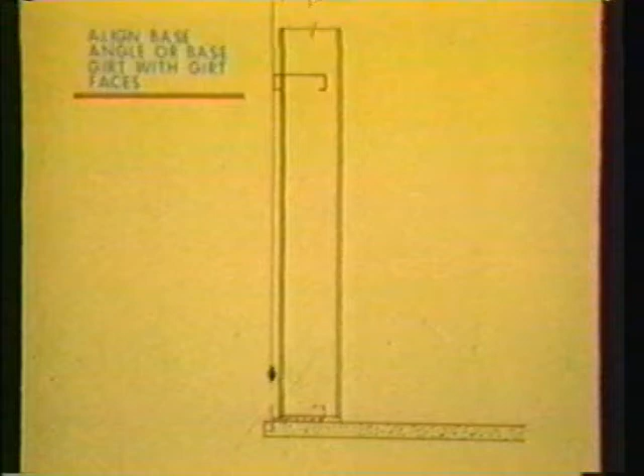...of the base for the wall sheets. This can be easily accomplished with a plumb line. Avoid setting base angle inside concrete edge. Otherwise, panel dimples can occur when fasteners are driven.

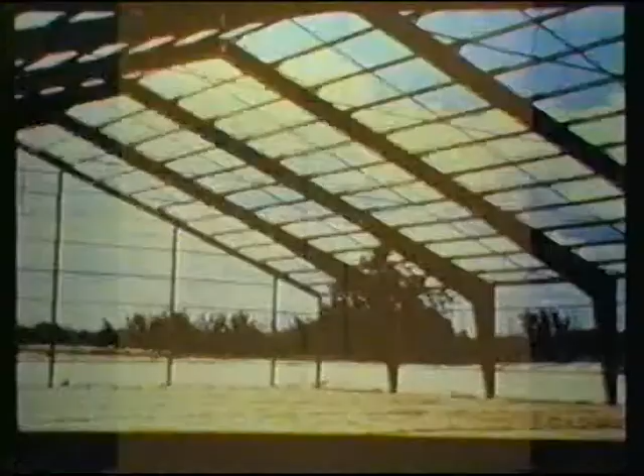Upon completion, the skeletal structural steel should include all primary and secondary framing with all flange braces, rod bracing, girts, purlins, support angles, sag rods, and other miscellaneous structural components in place.

A final alignment check should be made before sheeting begins to see that all member structures are plumb and aligned properly. Once the panels are installed, it is difficult to correct any structural steel alignment problems without removing or damaging the sheeting. Give the structural steel a final connection inspection to ensure all bolts are in place and properly tightened.

Bolt grades and tightening procedures vary from connection types. The primary high-strength A325 or A490 bolts must be tightened according to specific procedures, while secondary bolts are not. The builder must be thoroughly familiar with each. He must also be aware of the connection inspection procedures stated in the specifications and the material and procedural requirements called for on the erection drawings.

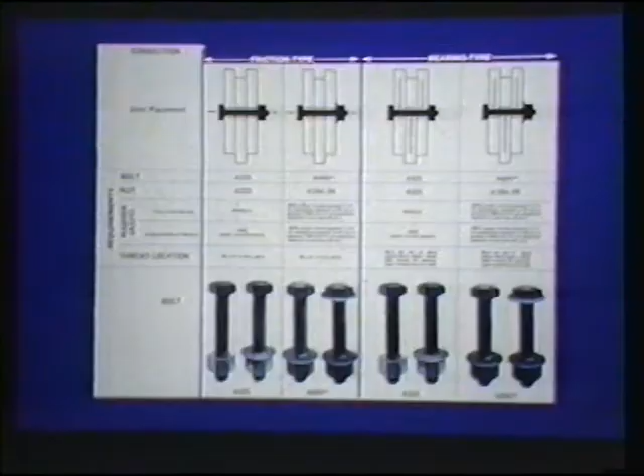It's a good practice to initial all completed connections. This way, a temporarily incomplete connection will not go unnoticed. A check should also be made to ensure that there are no damaged members which could require removal of the sheeting to repair. Some damage may be considered superficial without effect to structural integrity.

When in doubt, consult with the manufacturer. Modifications should not be made to any structural members that are damaged or do not fit without approval from the proper authorities.

Sheeting and trim, Section 6. The owner's acceptance of any building depends on its finished appearance. Sheeting, trim, and accessories are the most conspicuous elements of construction. They must be installed with the greatest of care.

Just as with structural steel erection, the crew should go over the manufacturer's detailed installation prints before sheeting begins. This will ensure proper and efficient installation of panels and trim and minimize the probability of most common errors. The tools, materials, and techniques of proper sheeting and trim installation are simple. By meticulously following manufacturer installation instructions, the builder can avoid unnecessary and expensive callbacks.

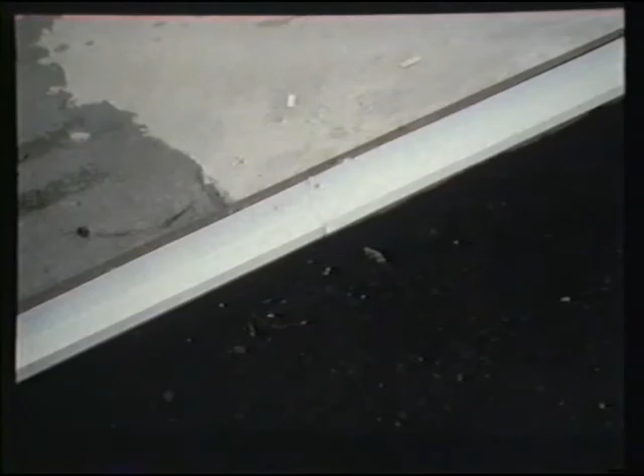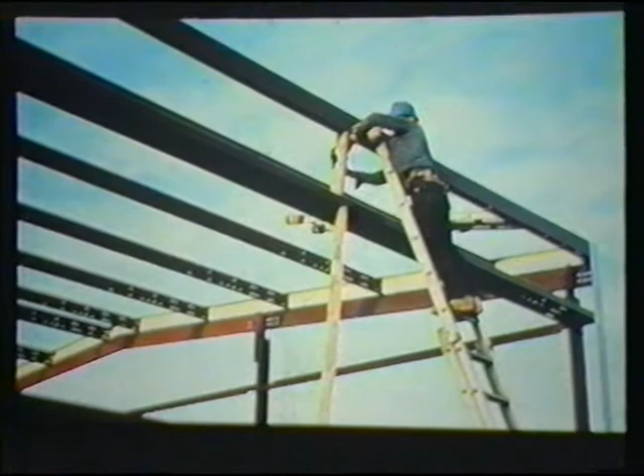It is strongly recommended that the wall sheeting be installed first. Wall panels lend a high degree of rigidity to an incomplete structure. Before the first wall panel can be installed, the base condition must be in place. Purlins can be aligned with a sag angle or blocked. Girts, especially those spanning wide bays and wings, have a tendency to sag. To align, it is recommended that the erector shore them up with wood struts.

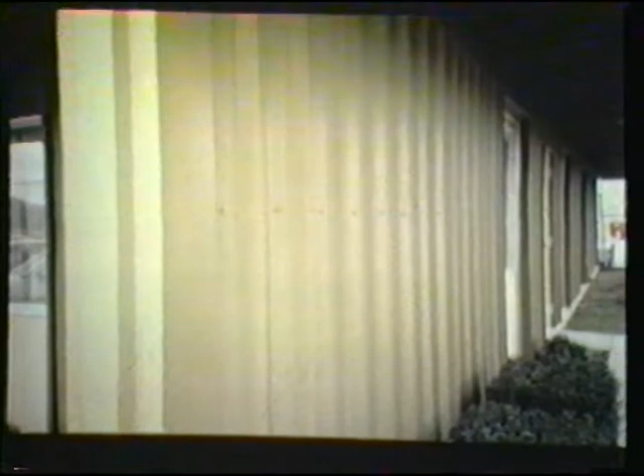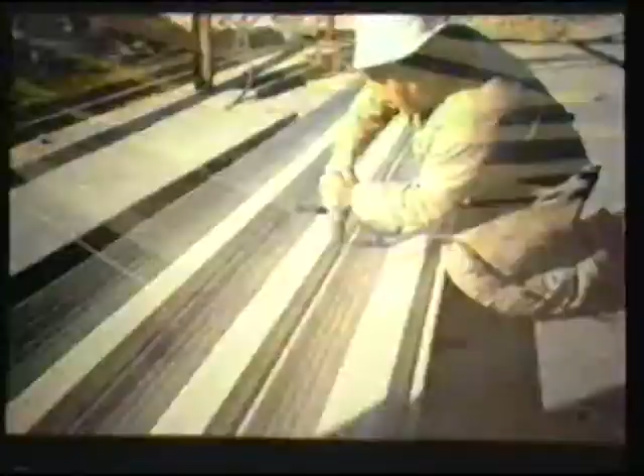With some panel profiles, fasteners form a very visible pattern down the length of a building wall. It is important to the building's appearance that straight screw patterns be maintained throughout the visible length of a wall surface. A quality appearance can be obtained by pre-drilling the wall panels. This method consists of stacking sufficient panels in a pile for a single bay. Pilot holes are then drilled through the entire stack in one operation.

Pre-drilling does more than assure correct alignment. It saves time in fastening since only the girt material must be penetrated. The hole in the panel acts as a pilot for the fastener as it starts to drill. Pre-drilling is also a deterrent to driving the fasteners through the panel and missing the girt.

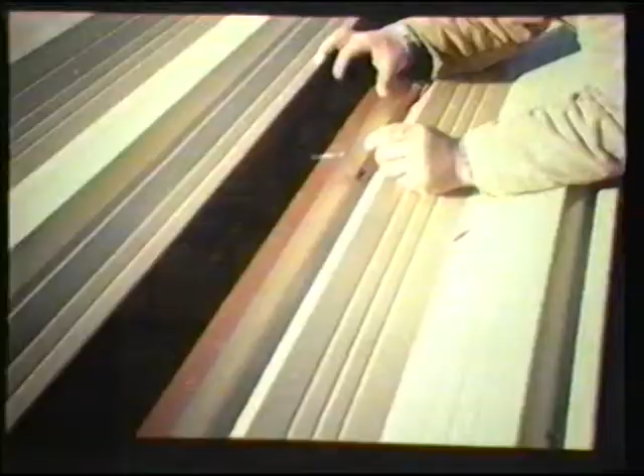Before drilling the aligned stacks of panels, measure the girt spacings. Start at the top of the base flashing and measure the distances to the center of the exposed faces of the girts. These spaces should be constant for the entire visible wall surface. Then, drill a test sheet and check for proper alignment before drilling an entire stack. The test sheet will be your template.

When aligning panels for pre-drilling, don't slide them in the stack. Lift them to avoid scratching the finished surface. The drill size should be slightly larger than the fastener thread diameter. Pre-drill only those panels you expect to erect that day. Be sure to remove the drill filings within the stack, which can discolor or stain the finish.

Wall panel installation should begin at the end of the building farthest from the point of maximum sight exposure, progressing toward the prevailing view. Thus, the shadow of the panel lap joint will not be apparent when viewed from this perspective.

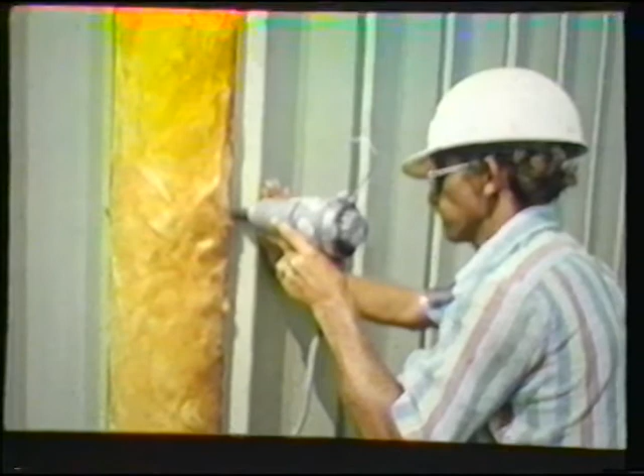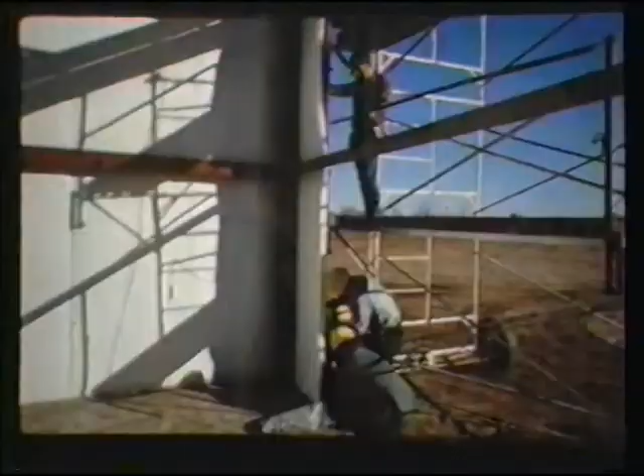Blanket insulation and sheeting should be installed simultaneously. Start at one corner of the building with a roll of insulation wider than the sheet width. Insulation should wrap around the corner of the building and extend beyond the lapping edge of the steel panel. This insulates the corners of the building and also moves the insulation joint beyond the point of the metal panel lap.

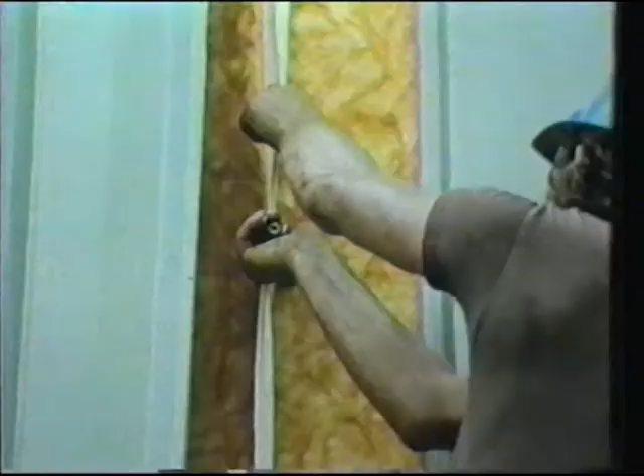Temporarily secure the insulation and smooth out the facing wrinkles prior to fastening the panel. Be careful not to stretch fiber blankets too tightly. This will compress it and reduce its thermal performance. Trim the insulation to length before installing the wall panels in order to avoid an inadvertent water wick.

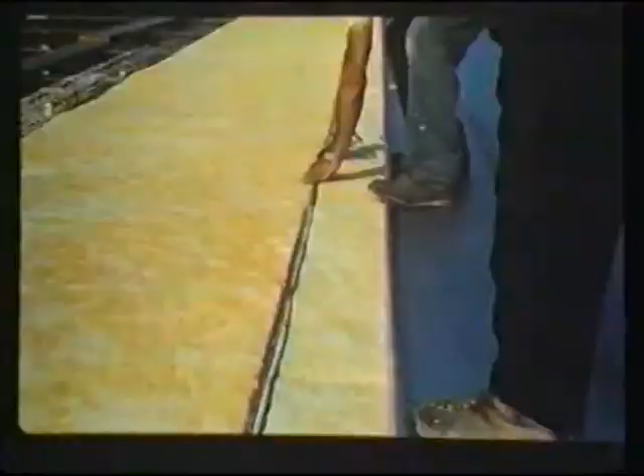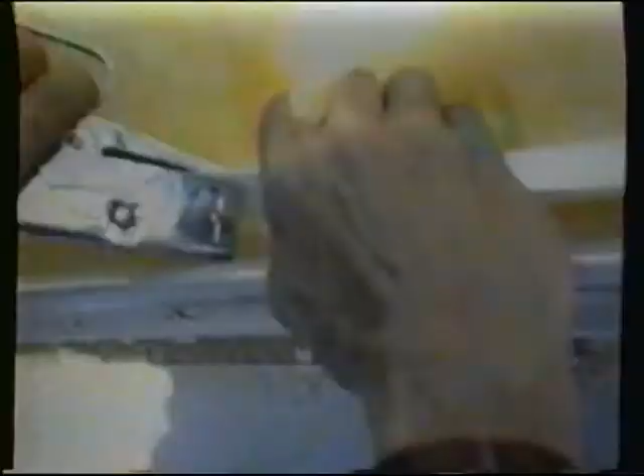Each successive roll of insulation should maintain the same amount of panel overlap. When joining successive rolls, pull the tabs evenly outward and glue or staple the tabs together. When stapling, fold the tab over and staple again between the first row of staples. To help maintain the integrity of the vapor retarder, tape the joint when specified and repair any facing punctures or tears.

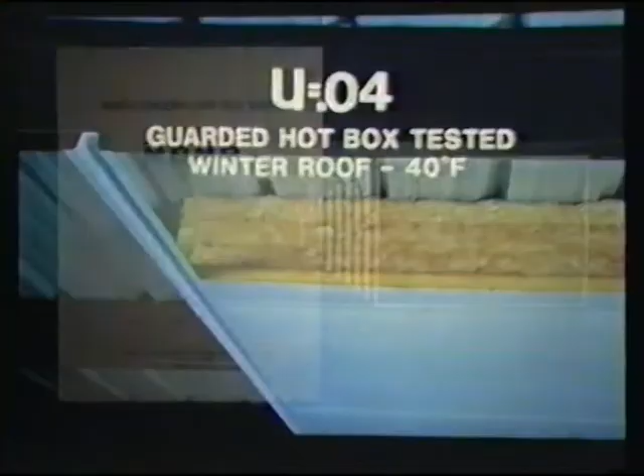Condensation is the biggest obstacle to achieving maximum thermal performance. MBMA has published a condensation fact sheet to help you understand and control this potentially costly problem. Always install the insulation with the facing toward the warm side or interior of the building. There are many insulation options other than blanket available to owners today. Each system should be independently evaluated with respect to its in-place economic value and its overall system compatibility.

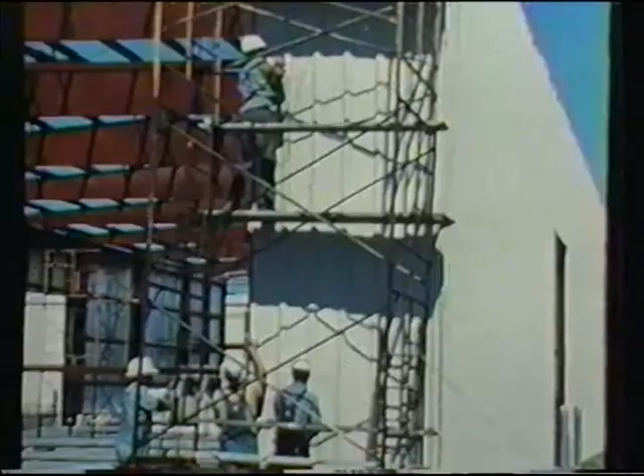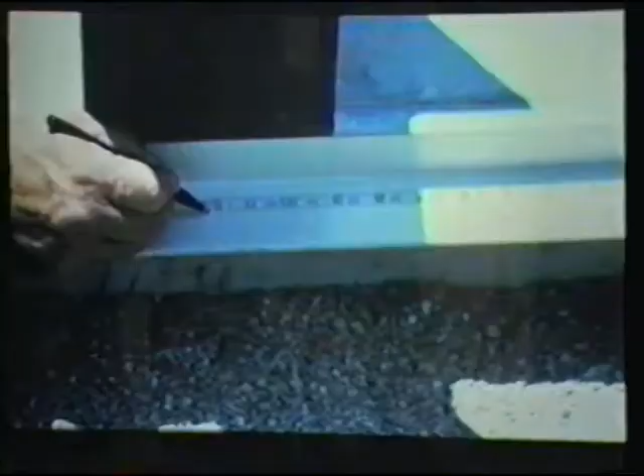Precise vertical alignment of each installed sheet must be maintained prior to final fastening. Misalignment of one panel will cause progressive problems throughout the remainder of the sheeted surface. When erecting wall panel, mark panel width modules at the top and bottom of the fastening base. This helps maintain panel dimension as each sheet is installed. With long panel lengths, it will be necessary to measure coverage at the middle also.

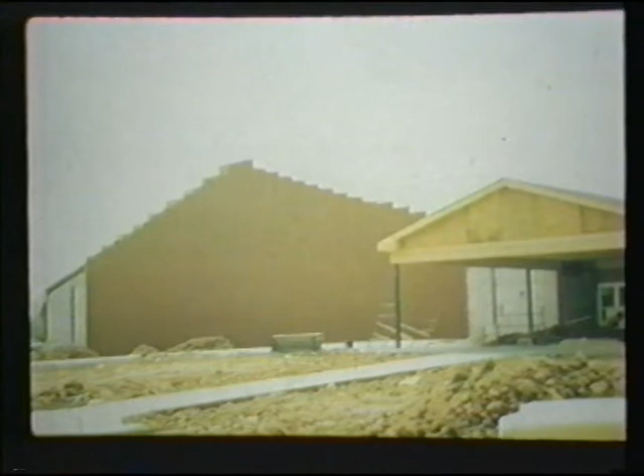The end wall panels may have to be field cut or backlapped to fit. Many times, end wall panels must be field mitered. Careful layout, especially on steep slopes, will ensure against panel gaps and sawtoothing. Panel fasteners should be installed in strict accordance with the project drawings. After the wall sheets are secured in each bay, the wood girt shoring may be removed.

As the wall fasteners penetrate the girts, even when pre-drilling panel stacks, small steel shavings are often scattered onto the panel surface. These particles are magnetized and adhere to the wall surface. If they are not removed, they will cause rust spots on the finish. These are difficult and time-consuming to remove. A quick wipe with a clean cloth at the time the fastener is driven will prevent this problem. Also, make sure that all drill filings on the base flashing are swept off at the end of each workday.

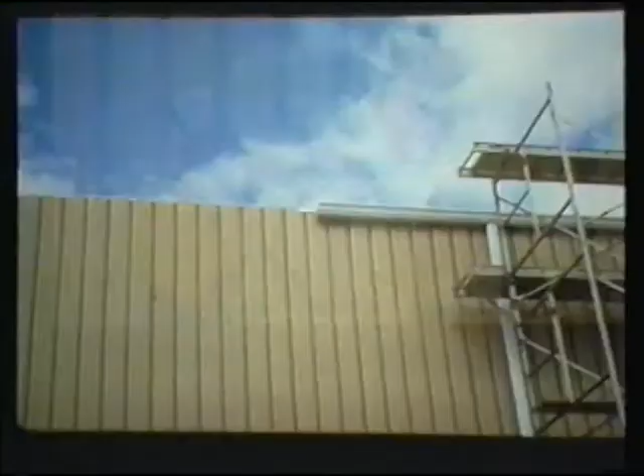The installation of the eave and rake trim flashings and closures closely follows or occurs simultaneously with the sheeting operation. Trim has an enormous impact upon the appearance of the completed building. Light gauge flashing and trim materials are extremely vulnerable to damage from mishandling. The builder's attitude toward quality is the biggest factor in determining the finished appearance of a structure. If the trim is not true, it detracts from rather than enhances the final appearance. The use of string lines, module markings, or line of sight and qualified personnel is always good insurance.

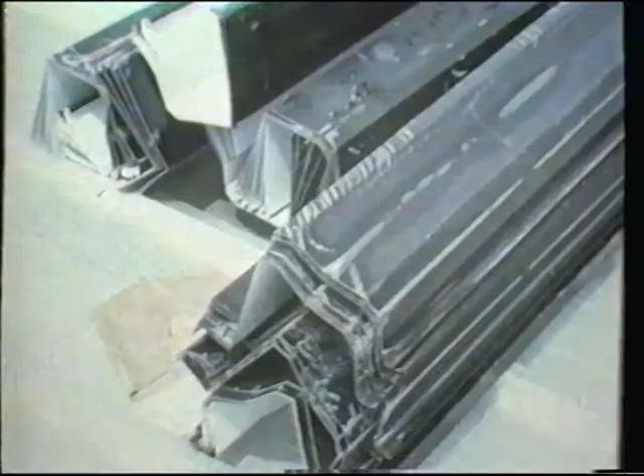Trim, flashings, and closures are usually fastened with sheet metal screws or pop rivets and sealed as indicated by the project drawings. Don't pass up the opportunity to pre-assemble as much trim as possible on the ground. As with the structural steel, your efficiency can be greatly increased by assembling as many pieces of trim as possible on the ground. But don't do more than can be safely handled without risk of buckling. If electrostatic wrap is used, it should be removed from the trim and flashings immediately. If it bakes in the sun too long, it becomes extremely difficult to remove and increases the possibility of damage to the finish.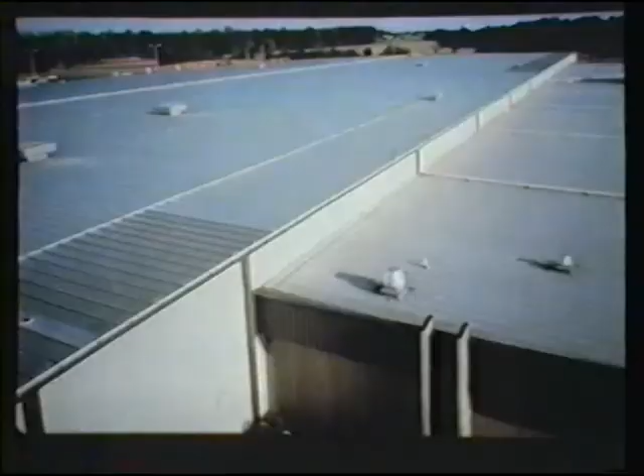Sheeting the roof is the single most important function in the erection of a structure. The roof must protect the building interior for many years. Yet it's claimed that leaking roofs represent more than half of all recorded construction claims. Proper care in layout, handling, and installation of roofing materials should be demanded of all crew members.

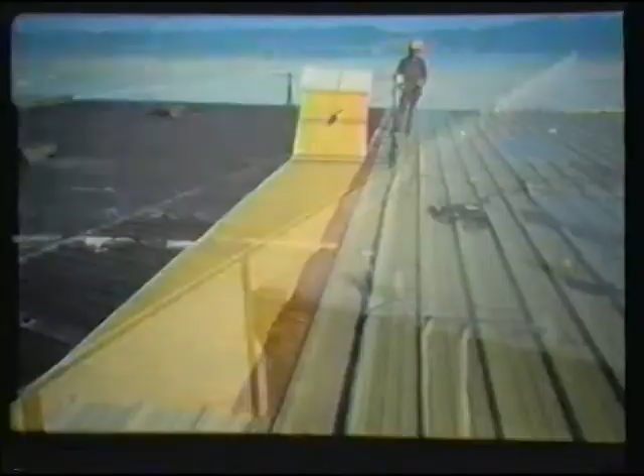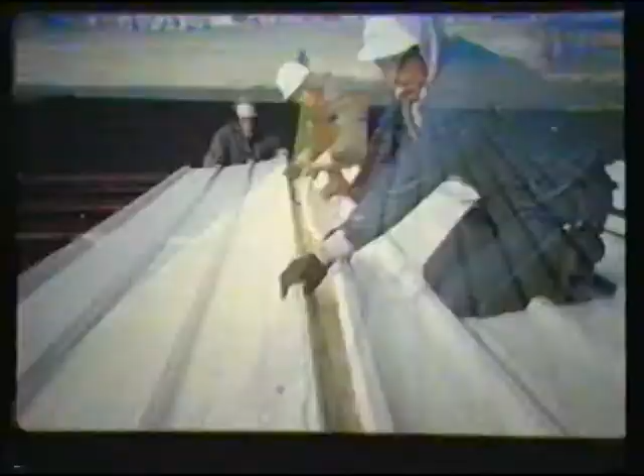As with the walls, roof sheets and insulation are installed simultaneously. The starter roll of insulation should again be wider than the starter sheet width. This overlap should be maintained throughout the length of the panel run to keep the insulation seams ahead of the lap joints. The ceiling tabs should be stapled or glued using the methods previously described. Sheet width increments should be laid out and marked for the entire run of roof panels. This will keep all sheet placements in alignment. All sheets should be positioned as indicated by the project drawings.

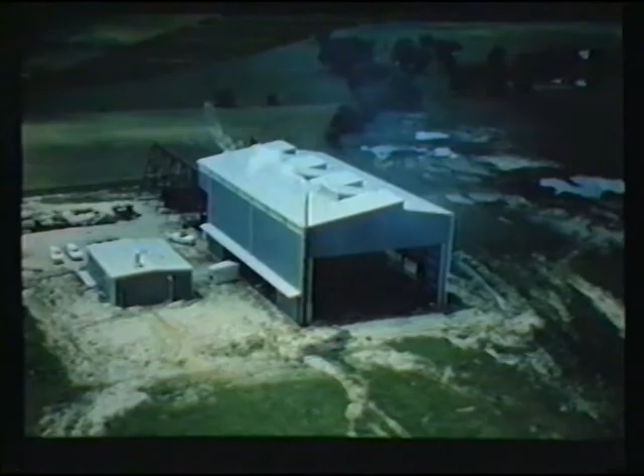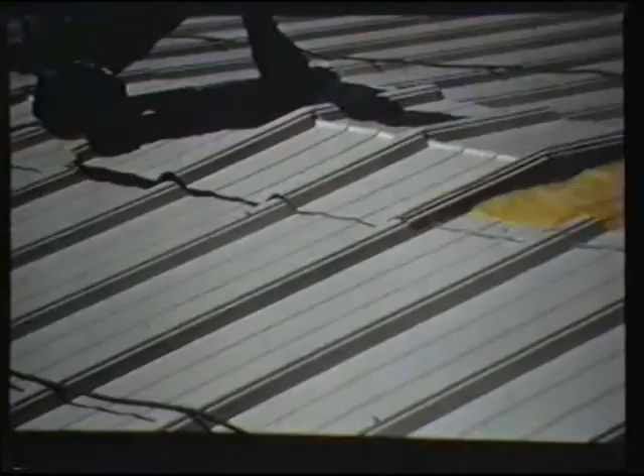Manufacturer instructions for the installation of eave, rake, and ridge details must be followed closely. Care must also be taken with the alignment of opposite slope panel ribs. This is especially true when working with handed panels. Proper alignment is mandatory for proper fit-up and integrity of the ridge condition. When possible, lay out the roof so that the lap joints are on the lee side of the most severe weather direction. This will reduce the possibility of a